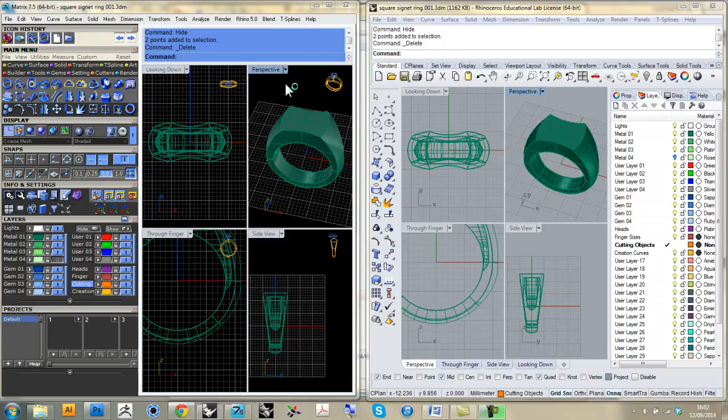It's a tutorial specifically designed for former students of Matrix so they can downgrade their jewelry making knowledge and still work in Rhino just fine. In this tutorial, I hope to cover several different aspects of Matrix builders and how to do them manually in Rhino. I'll probably have to break this into two parts. The first part will be replacements for the ring rail, how to control the grid snap in Rhino, how to make profile placer profiles in Rhino, and then how to use the gem loader and the bezel builder. In a subsequent tutorial, I'll cover some aspects of working with the gem cutter and a replacement for the gem on surface.

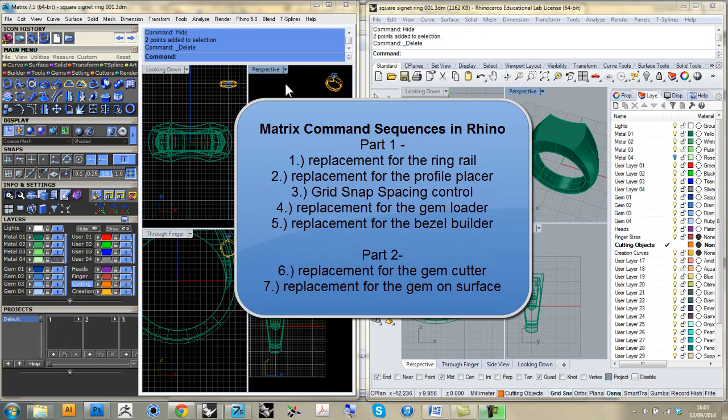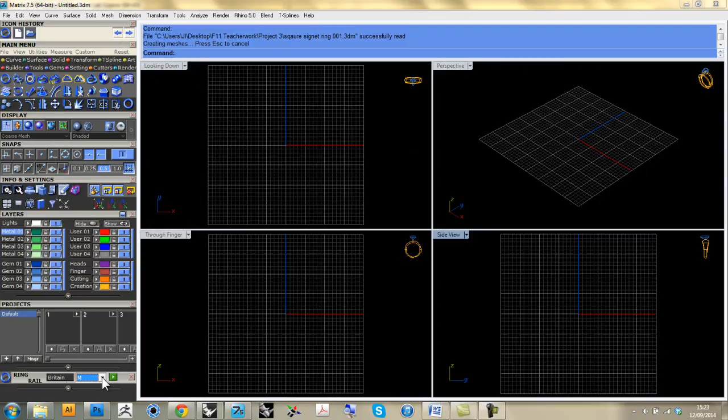First, let's start with the ring rail and profile placer commands. In Matrix, we would find them in the builder menu here, the last one, or in the tools menu here, the first one. Either way, with the ring rail in Matrix you're able to choose the nationality of what you're working with. Since we're in the United Kingdom, I'm using British, but American, Japanese, or what have you is available. Then we select the size and letter of the alphabet and apply it. That gives us a specifically sized ring circle of a given radius based upon standard measurements.

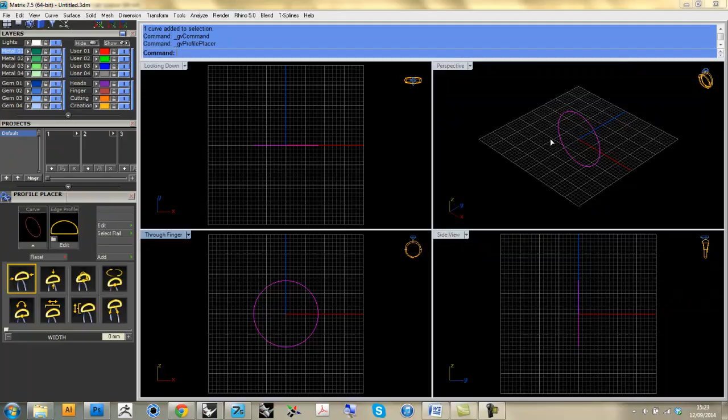Then we go to the profile placer, bring up this builder, and take this ring circle and apply it here to use dynamically placed ring profiles on a ring. I can theoretically place as few or as many as I want, and I can adjust them freely. Now, this is probably one of the most powerful features in Matrix, certainly one of the most useful that students take advantage of. There's loads of different options for shapes and sizes, and we can even create our own custom shapes. This is probably a big selling point for Matrix in and of itself.

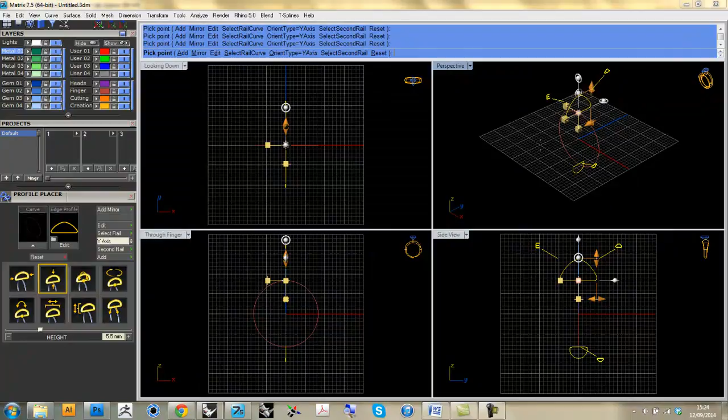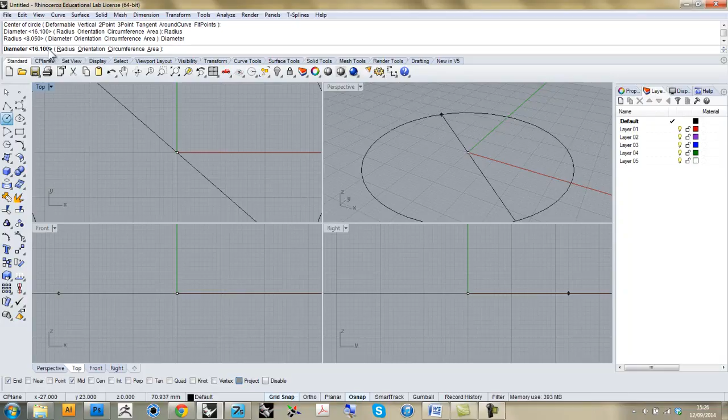But doing this in Rhino, as it turns out, is in fact possible. It's just going to be a little bit slower and take a bit more manual work on our part. So to start with, if we want to do a ring rail in the front view here, I would have to make a circle. When you make a circle, you set a center point and determine a radius or diameter in the command prompt. The main thing is that we need to know exactly what diameter our ring circle needs to be.

So what I might do, I've just escaped out, is go to the internet and look for any sort of online size converter. The one at onlineconversion.com/ring size is quite a good one. I can type in the same size of ring I was looking for in Matrix, and it gives me a diameter in millimeters, 16.1 in this case.

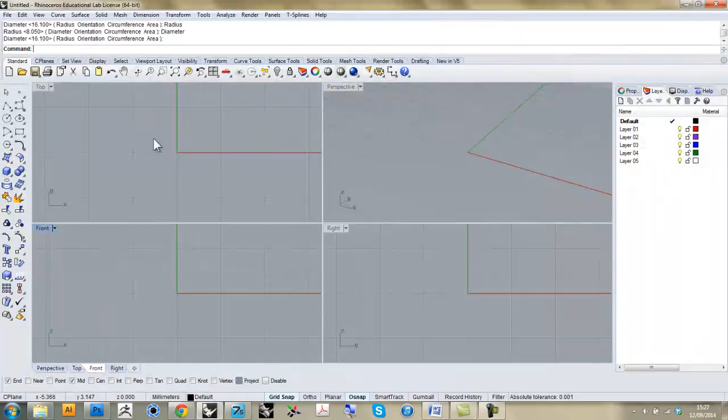Then I could go back here to Rhino, and I could make myself a ring circle starting from the center, and I could type in a diameter. Now, it's very important when you're actually making circles or making shapes with typed in coordinates in Rhino that you make sure that your mouse is in the work area or the viewport that you want to actually be working in. So if I was in the top view here and I typed in 16.1, it would make my circle

in the top view. However, I want the circle to actually be upright, as would be the tradition for any sort of three-way diagram of a ring. So I'm making sure I'm working in the front view with my mouse before I type in 16.1 for my diameter ring size. And once again, if you inadvertently are working with radius, you can just click on this option in the command prompt to switch between radius and diameter as needed. So that gives us a ring circle.

The next order of business now is we need to get a profile on this. There's a little bit of a trick to this, actually, and once you learn this trick, this is a lot easier than it looks. It boils down to really just getting the shape perpendicular in the right viewport, right on the ring in the first place. And then once it's there, we can change its position accordingly around the circle. So I would go ahead and use the line from midpoint. Now this command here, the line from midpoint, is going to be very useful to us for building profile shapes in Rhino. With the help of the quad snap, I don't need project snap on or off, doesn't matter.

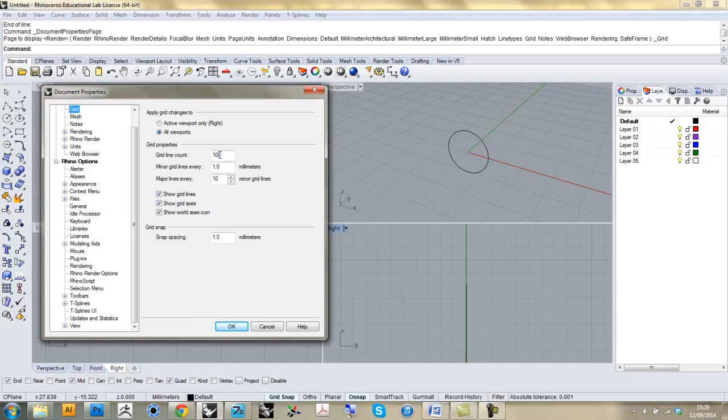And I'm going to go down and right click on grid snap and go to settings. Within settings, it'll go straight to the grid section. Now this is where I could control the size of the grid if I wanted to. That doesn't matter. If I change that to 50, for example, that's going to reduce the size of the total grid here. But more importantly, snap spacing is the one I want to worry about.

So snap spacing, if I set this to 0.5, that means when I draw a line, with a line from midpoint now, from this top quad point, I can snap not only to the corners of every grid square, but also to the halfway points. This is the equivalent of the 0.5 millimeter grid snap spacing we have in Matrix. If I wanted to work with 0.25 grid snap spacing, I could do the same change again with grid snap. But for this case, this should be fine. So now I have the spacing the way I want it to.

Now all I have to do to get this line straight is just hold down Shift. And that's going to turn on the orthographic snapping and keep it straight. And I can make this any size I want. I'll go for 6 mil wide here. So that's 3 mil in either direction with the line from midpoint. So that's giving me the bottom and baseline of my profile shape. Now for the top of the profile shape, I can pretty much draw whatever I want. I'll show you a complicated example on this one, and I'll show you a simpler example on the bottom.

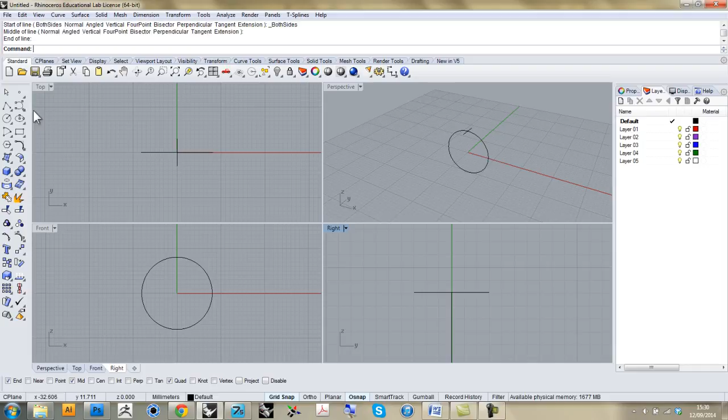So I'll use a polyline command, draw from the end snap here, and I'll go up, give myself a corner here, and then I'll use the arc command, the arc start end point on arc command, to build a shape that covers the middle of that. Now I could do this in any order, because the next part is I'm going to take this last piece here, and I'm going to mirror it across the axis.

And that will give me the left side and right side here. Now if you didn't line this up with the grid snap, this wouldn't be particularly accurate, so you'd probably want to use the end snap instead and draw it afterwards. And I could go outwards or inwards, it doesn't matter. Likewise, I can set the size of this to pretty much anything I want.

Now the next important part here is I need to make sure that this shape is a closed shape. So that involves selecting it all and joining. And that will give me a single closed shape, and it will even say so in the command prompt. But that's the basics for building a profile. I could do the same thing on the other side if I wanted to.

For example, I could actually use the same line from midpoint here, drawing from this point here, and going across. But this time I want to actually specify a certain distance. I want this bottom profile to be maybe 3.5 millimeters wide. So, because I'm only going halfway with this line from midpoint, I'm going to type in half of 3.5, or 1.75.

Now typing that number and pressing enter in the command prompt constrains my distance. It restricts how long this line can actually be. So that's automatically set the width of this line for me. If I hold down Shift, it gets it straight, and now there's nowhere I can go. This white line is the difference between where my mouse is and where the point is. So just simply place the point. And there we have it, a 3.5 millimeter wide line.

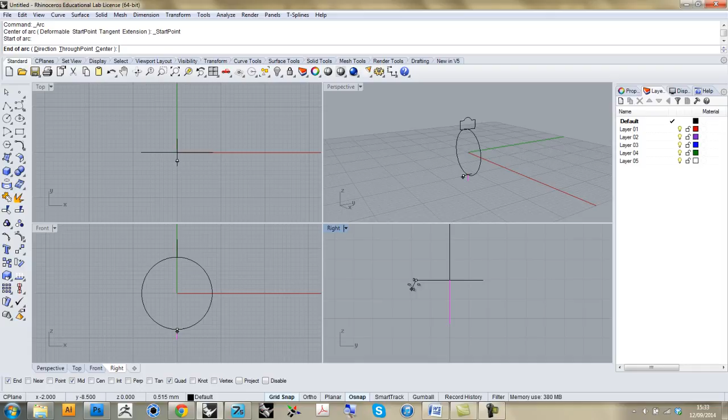Now this line I'm not going to keep. It's just here to give me the measurement I need to be able to make my shape. And now I can use the arc command here from endpoint to endpoint, and then the middle is going to be up to that endpoint. Now that's guaranteed that the height of this is 2.2. I can now get rid of this vertical line. And this shape is now 3.5 by 2.2. Once I join it, I have a finished shape.

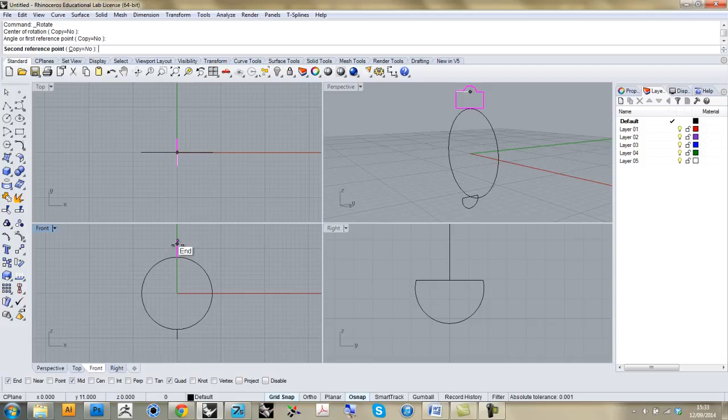And there it is. Now if I wanted to actually position these cross sections at an angle, it's actually easier than it looks. All I have to do is go to the front view and rotate them through the center. So my center of rotation is the center of the ring. And my first reference point is going to be right on that profile. And then I can position it at any angle I want. Maybe we'll try like a 2 o'clock angle here.

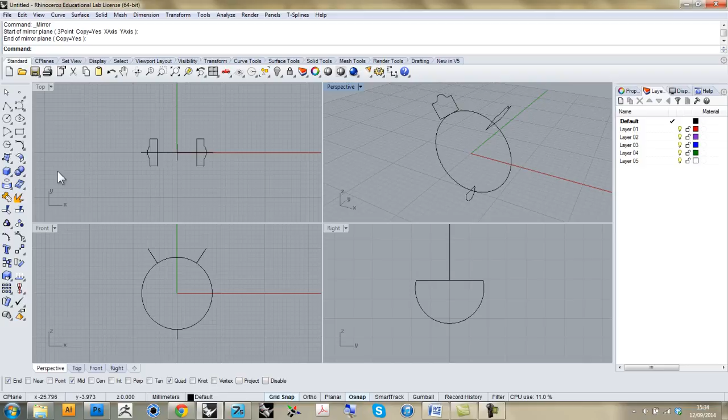And I could get the same angle on the opposite side with a simple mirror command. Oh, wrong menu. There we are. Just right through the center axis once again. Oh, I missed it. Try again. Straight to the middle. And this gives us the 3 profiles we need for a one-rail sweep. We find the one-rail sweep in the surface menu here.

Now, it doesn't have history on it, but in all honesty, we don't need it. We just need to make sure our seams are correctly located and lined up. That's going to be a big one here. One of the big differences between with and without history are these seam controls.

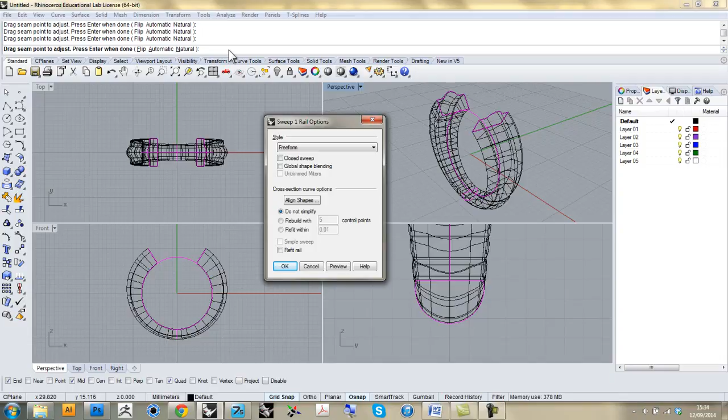Between this and this menu here, which really has all the same options we would have had in the command prompt with a one-rail sweep with history and matrix, only with a couple of additional ones that, in this case, we don't terribly need. I'm going to leave it open for the next part of this tutorial where I make the setting. But this gives us the basic ring here.

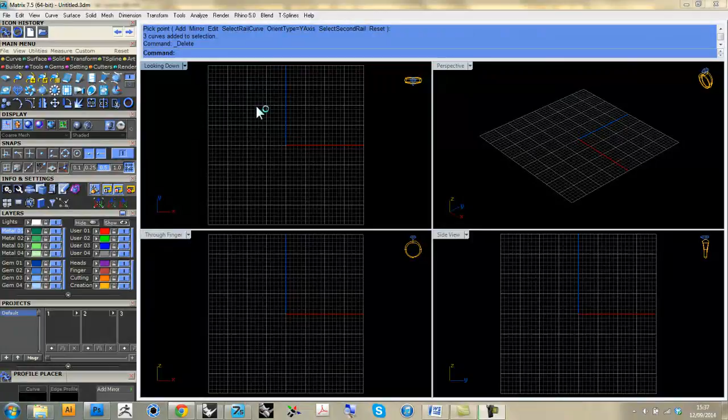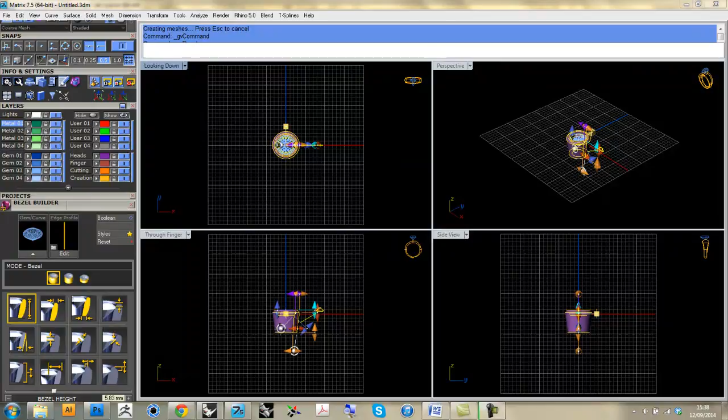Now the next order of business is to be able to take and make a setting for a gemstone. In Matrix, we would use the gem loader, and we could use then a round gemstone here of any size and shape we particularly wanted, say like a 5mm stone. And we would then go to the setting menu and we'd use the bezel builder. We'd apply the bezel to that setting. And it will make a preset shape which looks like it fits the stone.

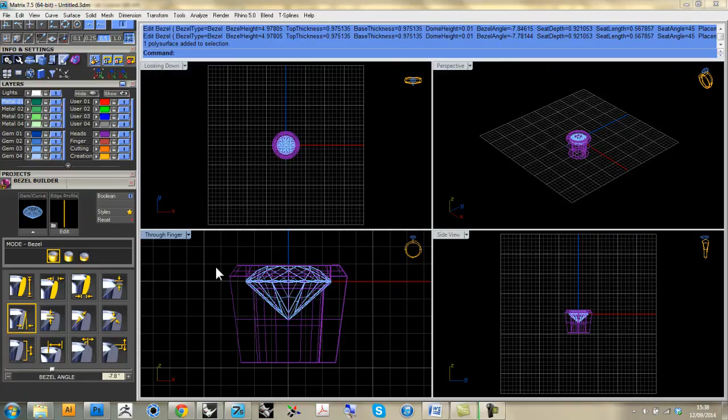In order to make a gemstone in Rhino is actually just a simple matter of using the right command to build this shape. In this case, there's a couple ways we could do it. One way would be to use the polyline and revolve the shape. I'm going to set it on its own layer here to differentiate it. And you just have to make the shape of the stone itself. If you have the dimension of the stone, even better.

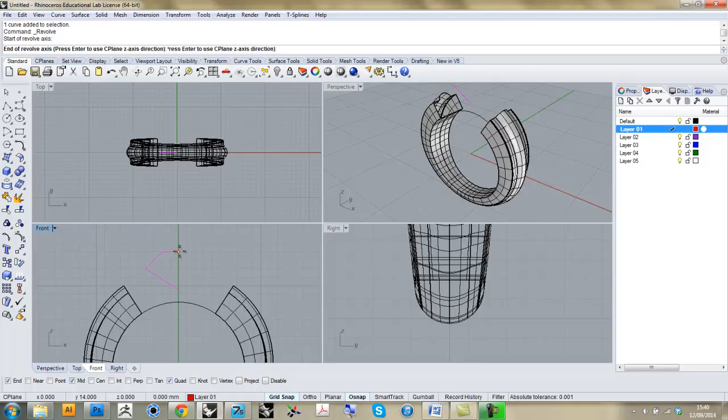And then we simply take that half cross-section shape there, that's sitting on the axis. The grid snap will help us here. And we use the revolve command to construct that shape as a solid. The full circle option will save us time. And that gives us the shape of this gemstone. It's not going to have facets as much, but for the sake of manufacturing, strictly speaking, we don't need facets.

The bezel is going to be made the same exact way. It's one of those big ironies with Rhino that most of the commands you use to make the gemstone are the same commands you'd use to make its setting. So we just simply draw on yet another layer the shape of the setting itself with the same sort of principle of what we did before in Matrix. So we have the same sort of edging.

Or if you genuinely can't be bothered to draw the shape like this, you could draw a simpler shape, which will look something like that. This is more like the traditional collets you see traditional bench jewelers making by hand and using with various types of cutting tools to be able to make a seat for the stone at the bench. This would work just as well as this, although I generally prefer this because it looks more professional. So again, take that shape and simply revolve it.

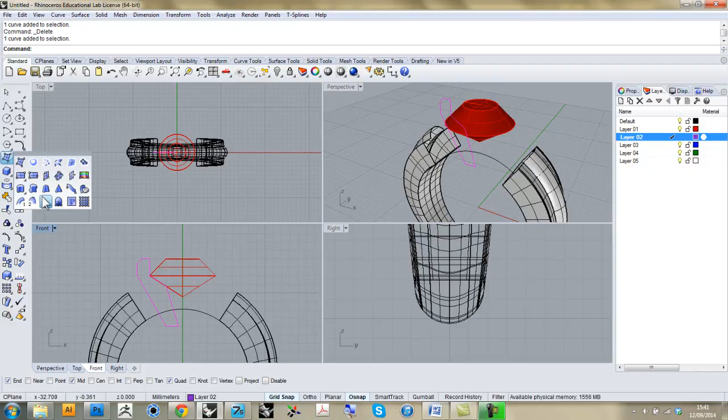Now I can almost hear everyone asking, well, what about stones that aren't round? As it happens, we can use a very similar command to do non-round stones called the rail revolve. Now the rail revolve works exactly like the revolve command, only it works by forcing the shape around an additional shape-defining rail that could be anything other than round. So we could do like a square shape, we could do a rectangle, an octagon, an oval. I'm going to try it here on a rectangle just so you can see.

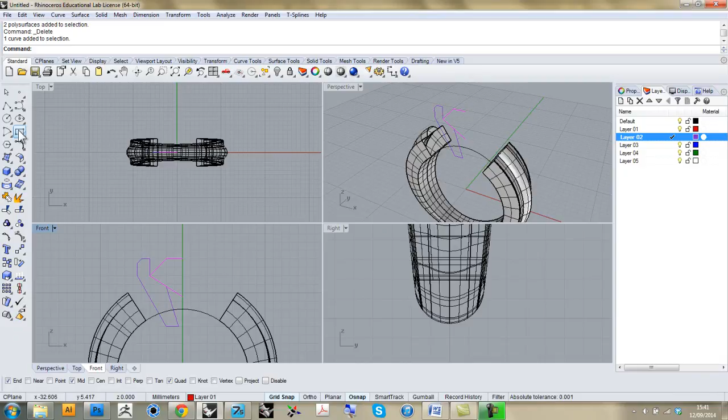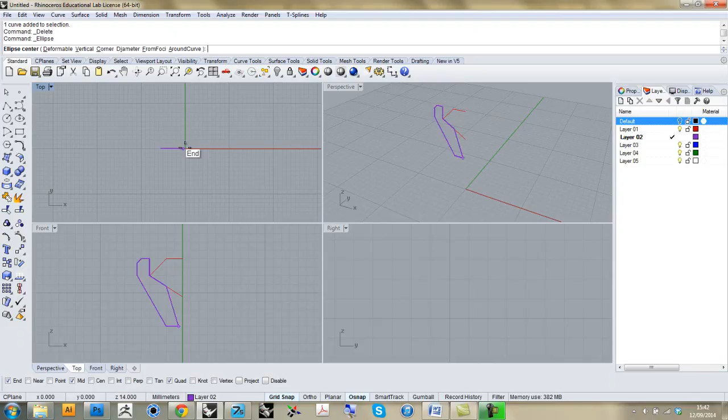So I'll turn off the default layer so I can see what I'm doing. And I will need the project snap on this time. Otherwise, when I make my shape, I'll show you with the rectangle center corner, the shape might end up going three-dimensional. In this case, it doesn't. But it would definitely go three-dimensional on an ellipse. That angle right there is precisely the reason why we wouldn't bother doing this command without project snap on. If I do the project snap on, the shape works a lot better, as you can see. Keeps it flat on that particular grid.

So I'll do the rectangle center corner, and I'm going to try and line up my rail here so that it passes inside both shapes. There it is. And then I'll move it so it sits inside both.

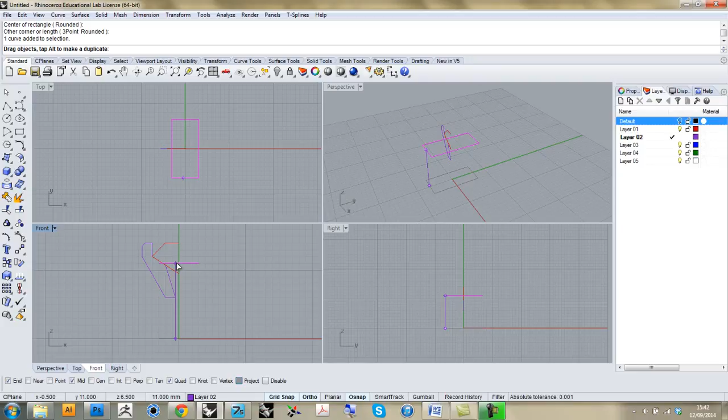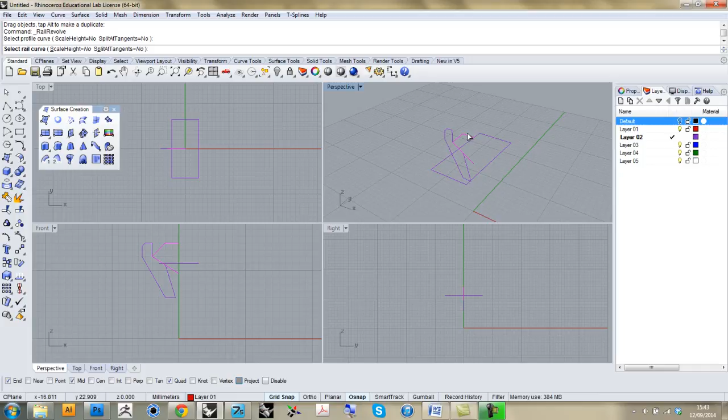Once we have that, we can then use a rail revolve on each shape individually. Rail revolve will be found in the same menu as the surface creation commands, such as sweep and revolve. As a matter of fact, rail revolve is actually a right click on the revolve command. So we just select profile curve, select rail curve, and our axis is going to be the same axis we use for the ordinary revolve. And that's going to give me a gemstone that's shaped like a rectangle.

And now I do the same thing for the setting. Rail revolve, gemstone shaped like... I grabbed revolve. So if you accidentally grab revolve, it will give you a circle, which isn't going to fit very well, as you can see. So I'm going to right-click on rail revolve this time and actually do it right.

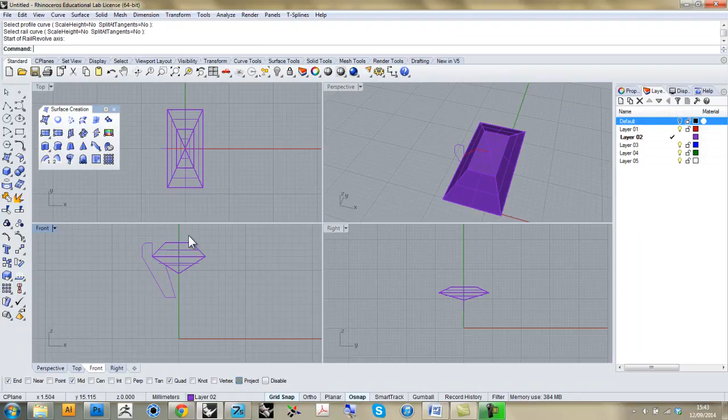The rail may be hidden. If the rail's hard to see, you can actually take your stone and put it back into its original layer and even turn it off. You can do them isolated one by one. That might actually work better. Such as there. Now we have ourselves a working setting.

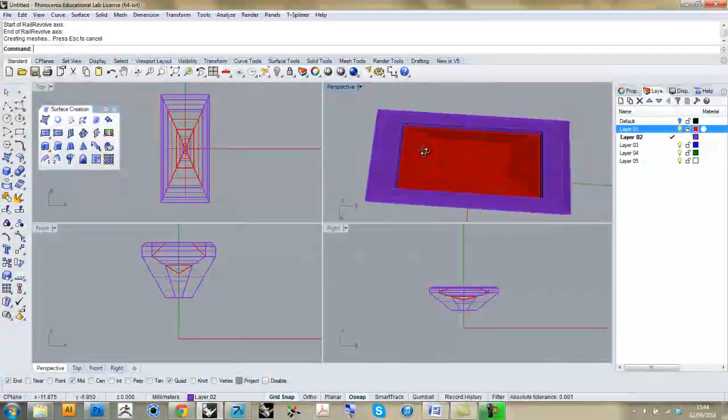Now, one side effect of the rail revolve is that the sides might get a bit wider if it gets too long than the other way. If this happens, we actually have another way of potentially building a gemstone in the setting, which would involve the loft command.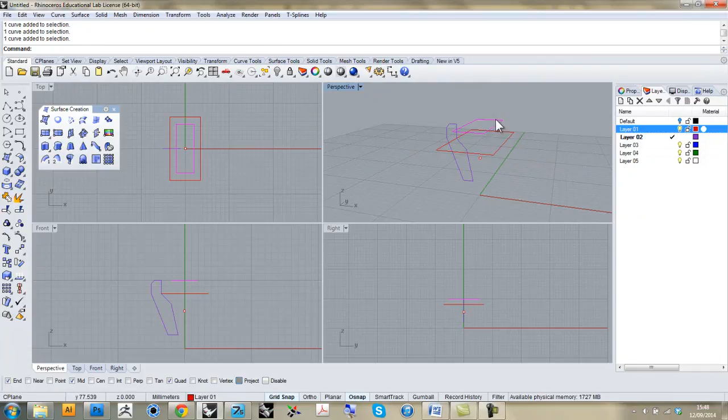Another way of building a gemstone and setting would be to use some other basic surface creation commands. In this case, I've set this up to work with a loft instead of a rail revolve. So I have two curves for the top table of the stone, the girdle of the stone, and one for the culet, the bottom tip of the stone. These three shapes are going to be the basis for my loft command to build this into a gemstone. I'll do this on the red layer.

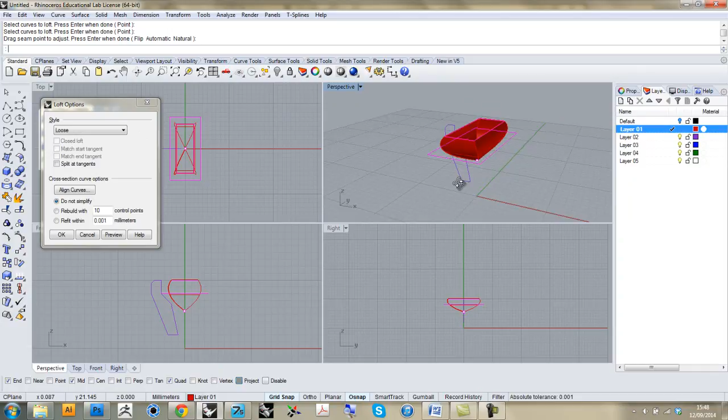You just need to make sure that your seams are in the correct location, just like at this sweep. Now, the shape you're going to want to use for the style of the loft here is going to be straight sections. That will give you the nice basic geometry we would get, which would be very similar to what we would get from a revolve or rail revolve. The only difference is it's not going to stretch as much going in the long direction. And it will need to be capped, which is fine, it's easy enough to find - the cap command.

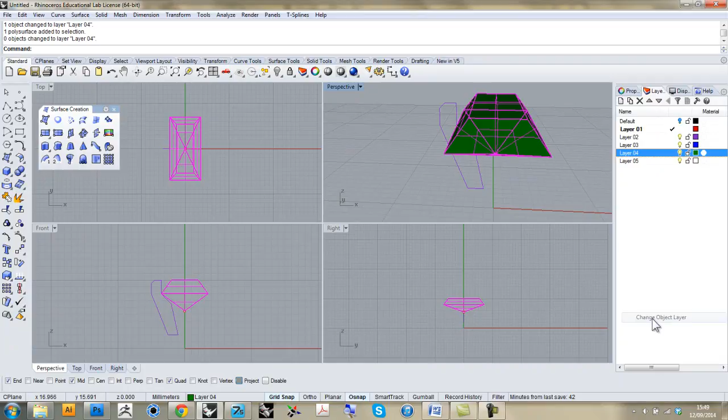Now, for the actual setting, we could potentially use the loft to do this, but it's going to be a very difficult way of doing it. I'm going to put the stone on its own layer, go to change object layer. You'll notice here that actually changing layers in Rhino is going to be a bit more complicated than in Matrix, but it's easy enough to do. Just go to the layer menu, right click on it, and go to change object layer. Then the light switch and locks work the same way as they always did.

Now we have this curve here, which is the girdle we used for the loft. I'm going to use that as a basis for a one rail sweep with this cross section. Sometimes this will work, sometimes this will not. So the rail comes first, and the cross section comes next. And we give it a go.

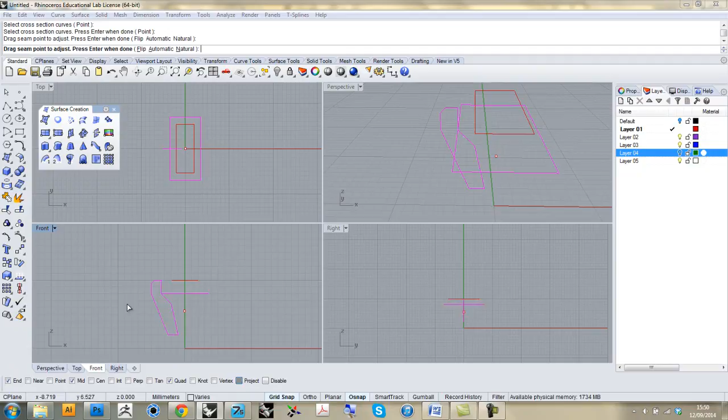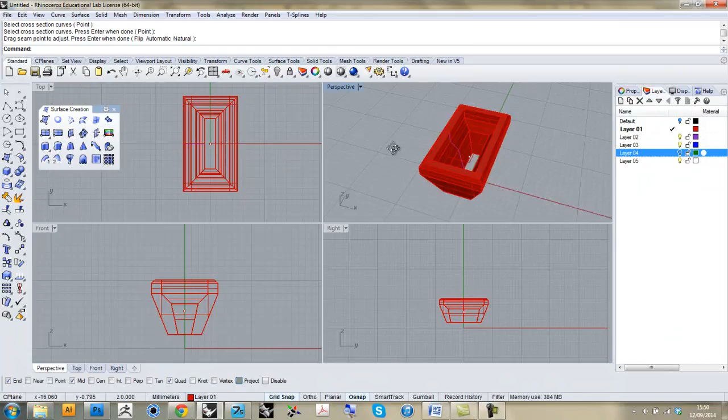The most common reason why this would fail is it just doesn't like the sharp corners, in which case one way of getting around that would be to simply fillet out the sharp corners on the girdle, which should fix the sweep working. But in this case, we got lucky. Most of the time nowadays it will, but every so often, maybe 1 out of every 5, it will just fail outright with this sweep. But if it does, it's an easy fix - just fillet, just soften up the rail so that it doesn't have these sharp corners.

But this gives us a nice stone and setting, which is going to have a more consistently even wall. And this will work very effectively as a replacement for the bezel builder and the gem loader.